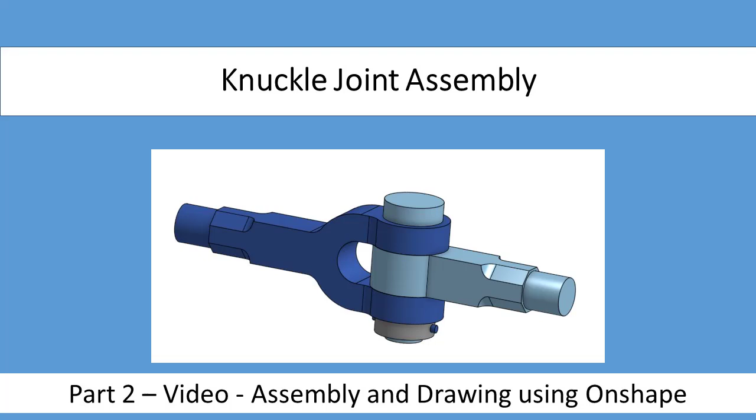In this video, we will learn how to create the assembly of the knuckle joint. If you didn't see how to create the different components of the knuckle joint, you can check my previous video, which I had given in the description as a link. Now let's move on to this video.

Click on the assembly. First, let us try to insert the different parts. First, I am going to insert the fork end. Give the tick mark to confirm it. Whenever you are inserting any component, the first component you must fix. So let us try to fix the fork end by right clicking in the tree. Just confirm the fix so that the fork end will be fixed over here.

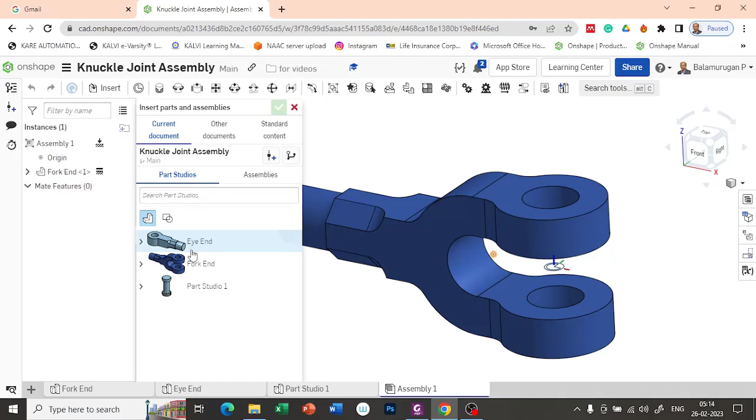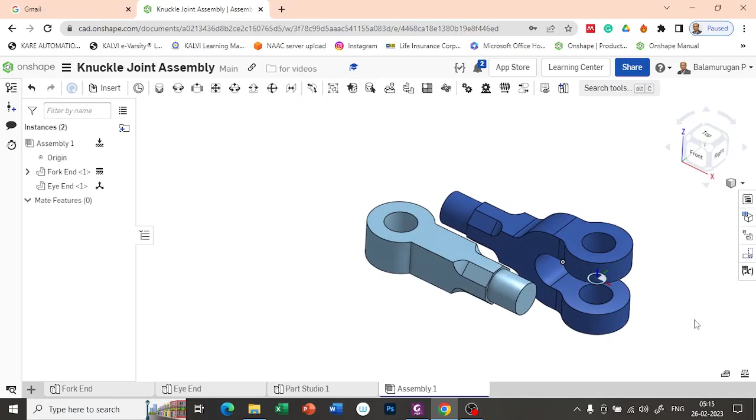Now let's insert the second end, that is eye end, and confirm it. So here you can see I can align this particular hole with this hole over here. So for that I am going to use the revolute mate. The top center, you can fix it out with this bottom center, so that it will be aligned with the Z axis, and Z axis I am coinciding. Just confirm and close it. Now we have connected the second one.

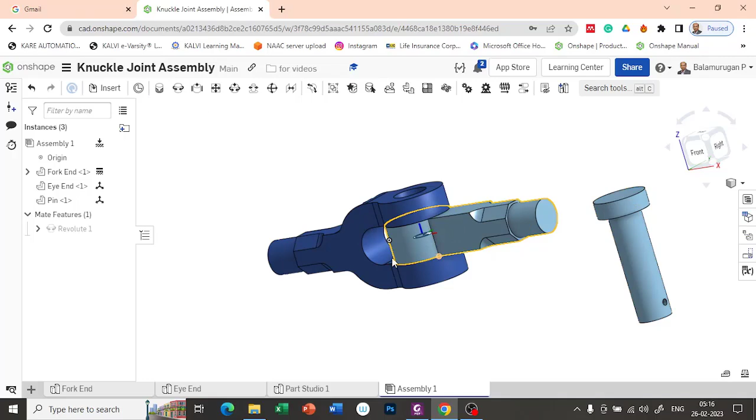Now let's try to insert the third part. So the third part I am going to insert is a pin. So this pin is going to be placed inside this hole. Let's try to make it. So here also the pin is allowed to revolve. So let me try to make the cylindrical mate between this one and this surface, the inner surface. So let us try to make it.

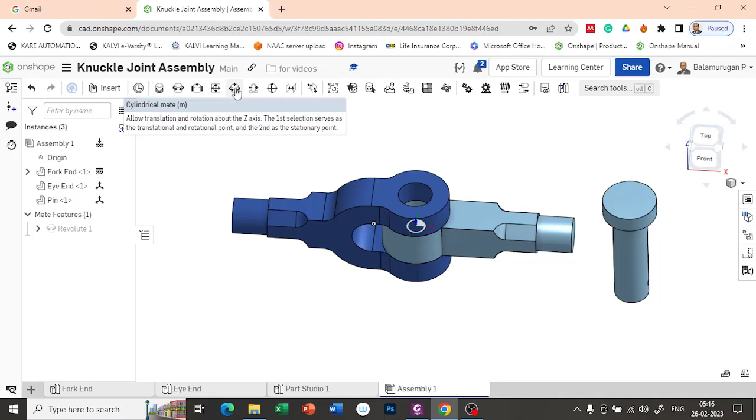So here I don't want any translation, so let us try to make the revolute mate. So here the top face end, click on that, and here the top face end. Confirm it. Okay.

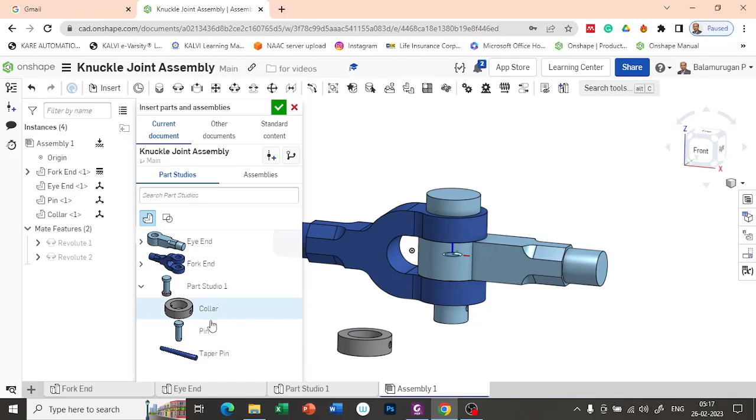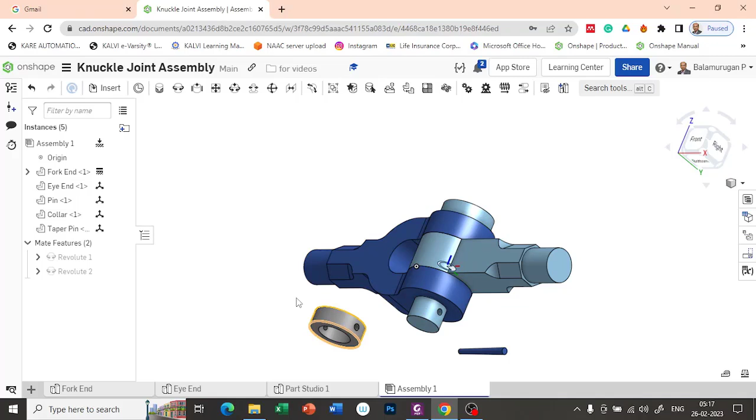So now the remaining two parts we need to insert. So let's insert the collar, and let's insert the taper pin. So these two we have to place over here. So for inserting that, the hole center has to be at this exact place. So let's try to first coincide this center with this center, then let's give the offset distance.

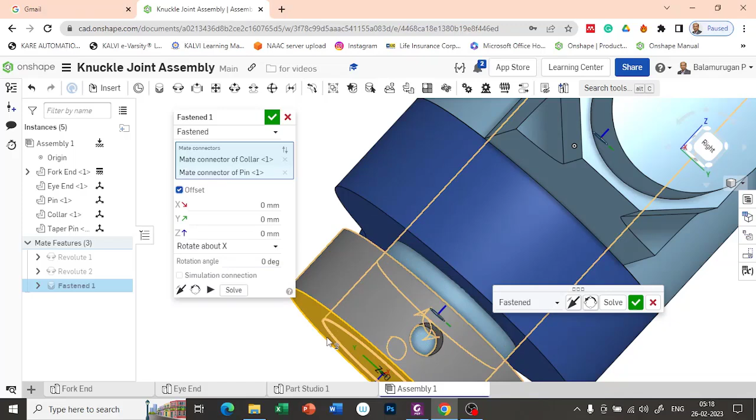So go for the fasten mate, between this center and this center. So if you provide it, you can see there is a center distance between the inner hole, the pin hole, and this collar hole. So that distance is actually 4 mm, on the negative direction. So let me give it as 4 mm.

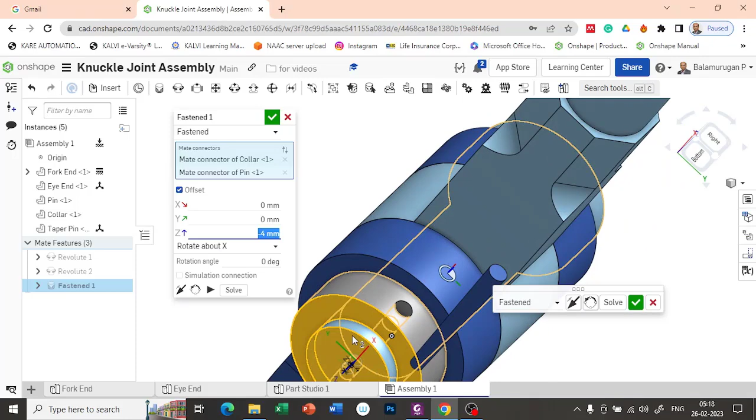Now you can see that is moved. So here you can see that. Okay. So let's confirm it. So now the collar is inserted into the pin.

Now I need to make this pin inserted inside this. For that, there are two ways. One is you can make a mate connector on the collar center or on the pin center, so any one you can make. The other one, if I place the mate connector at the center and coincide it, I can make the two parts together easily. So for that, let's try to learn how to create a mate connector on a particular component.

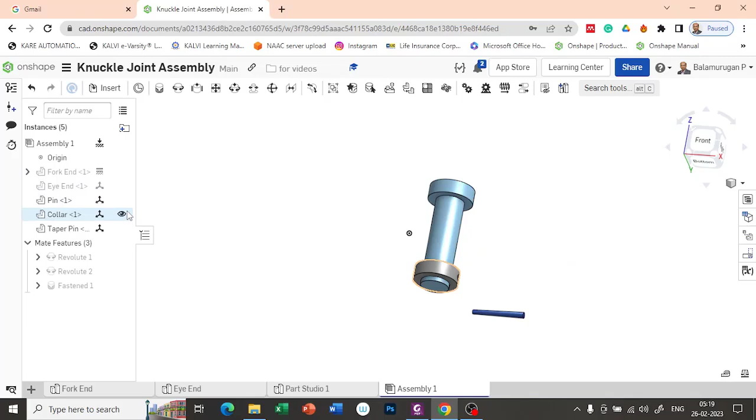So let us switch off the other components over here. For example, I am switching off except the collar. So let us try to make it. So fork end, eye end, pin, I am switching it off, that is hiding. Now let's try to insert a mate connector exactly on the center, which is having the Z axis in the orientation of the taper pin.

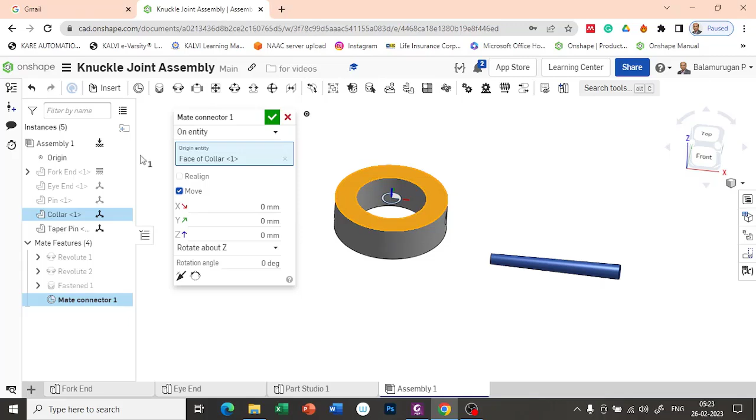Let's try. I am trying to move the mate connector here from this one. Now let me try to move it towards the center, -6, so that it will move towards the center. Now I am going to rotate. Actually this one I have missed out here. So this one I am going to rotate about the y axis so that Z will come and align with this hole. So I am going to rotate about the y axis and the rotation angle is 90 degrees.

So now you can see here it is aligned with this one. Now let's try to do the fasten mate between this one and this center, so that both will be aligned properly. Now you can switch on everything.

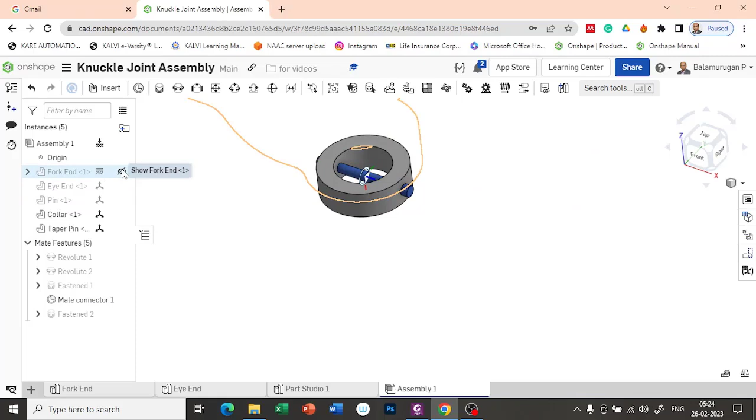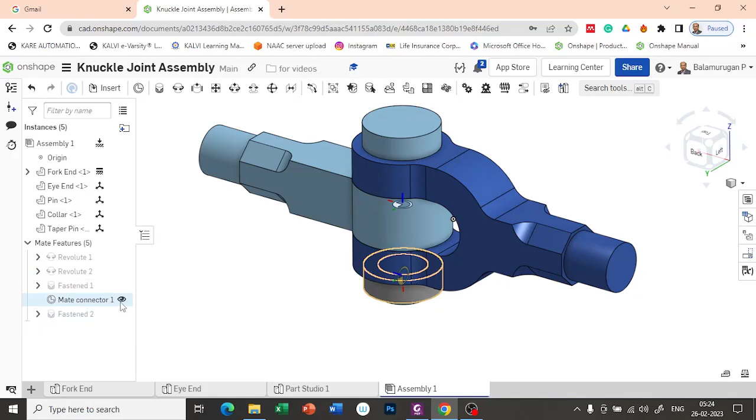We can see here all the parts are assembled together now. So if you want to switch off the mate connectors, you can switch it off if you want. Or if you want to switch off all the mate connectors, right click over here. First let us show all mate connectors. Then if you want to hide all mate connectors, you can hide it. So everything we have aligned. Now if you want to just check it out, the revolute mate, you can see it over here.

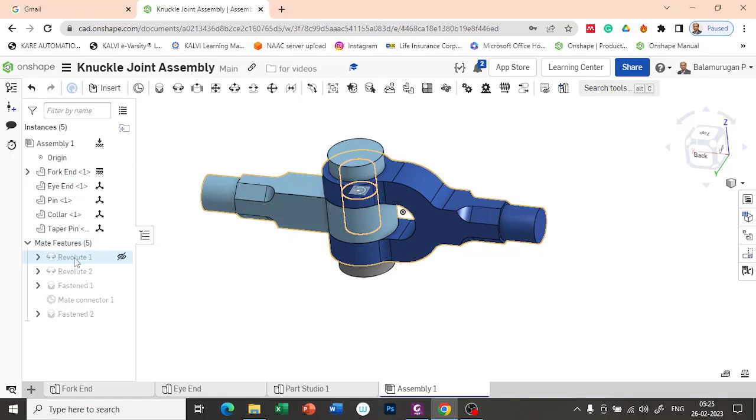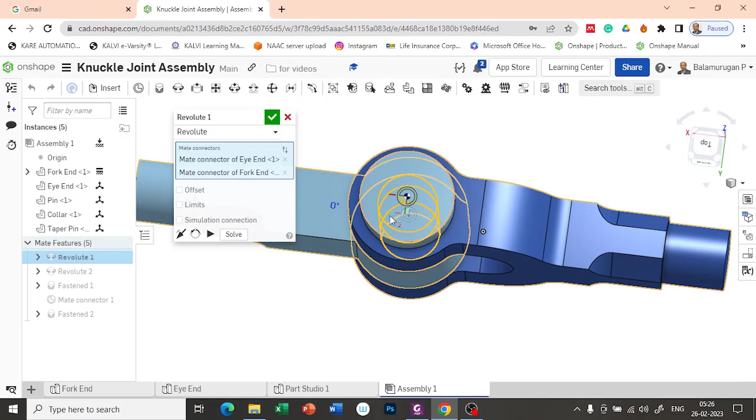So this is how it will be revolved. If you want to constrain it, you can do the constraining from this end to this end. If you want to provide a limit, you can reorient the secondary axis. In this case, if you reorient the secondary axis, it will start from here as 0.

Let's try to provide the limits. The angle of orientation 0 is maximum, 0 is minimum and 180 is maximum. If I provide that, you can feel the difference now. So here it's 0, it's 180.

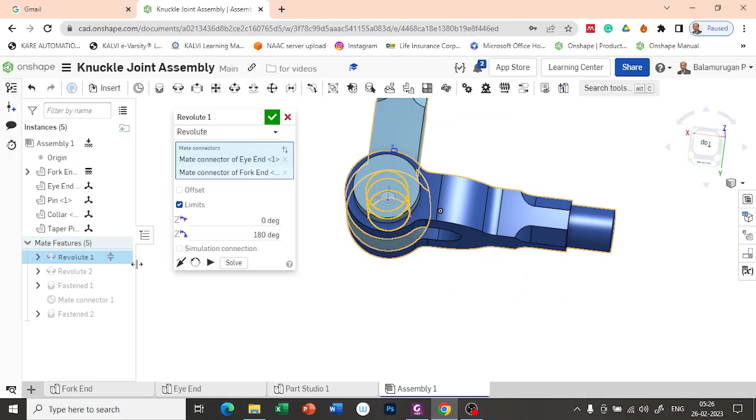Now let's try to reorient the axis again. Now you can see here this is 0 and this will become 180. So now it will only move along this particular direction. It won't move beyond that.

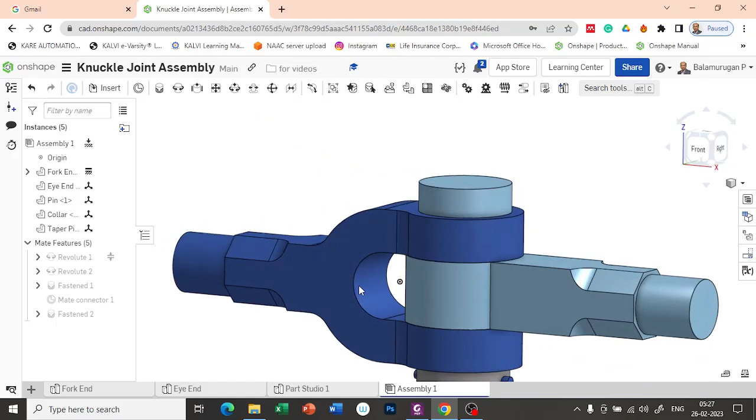So now we have completed our assembly. Now let us try to create the drawings. Let's create the drawing. I am selecting the template as ISO A4. Give OK.

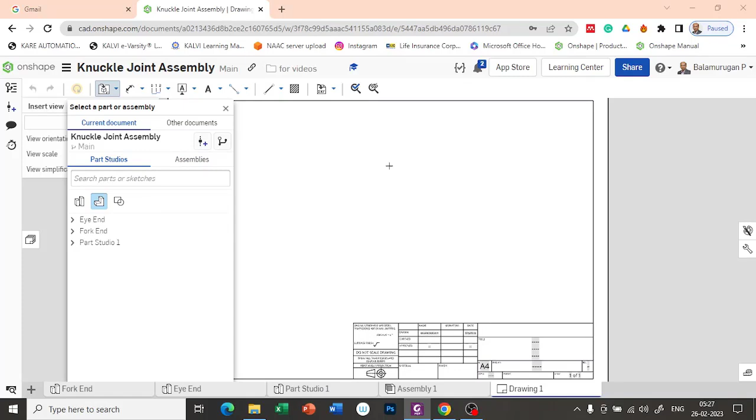Now in the first sheet, let us try to create the assembly. Then we will move on and create the individual component drawings. Go to the assembly, click on the assembly, and defaultly the front view will come. Let's click over here for the front view. Then it will show you the top view.

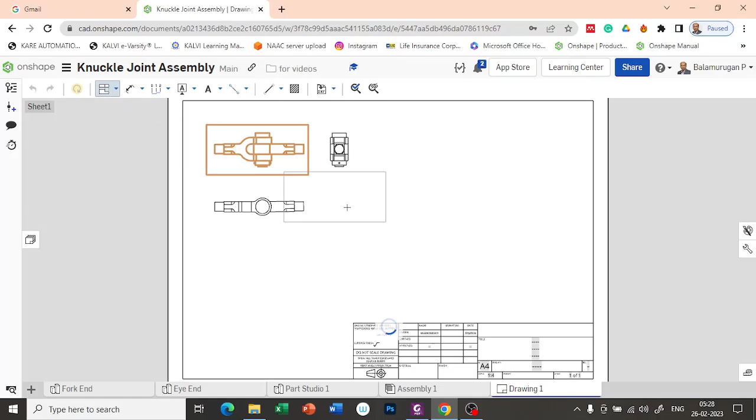Then let's go for the side view and isometric view. You can click over here in the projected view for the side view and the isometric view. For isometric view, just click on the front view and move your mouse diagonally to get the isometric view.

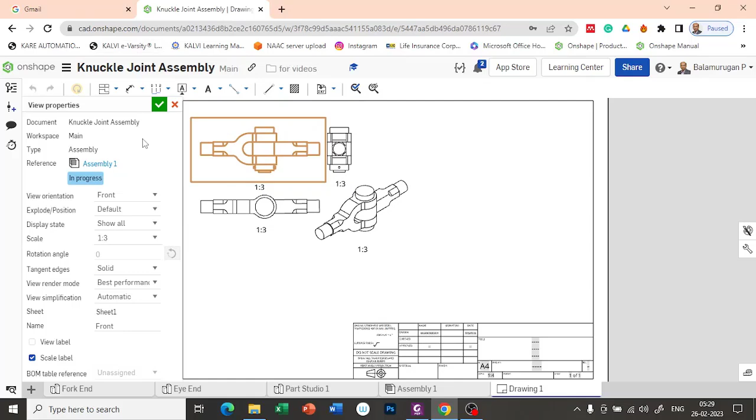Suppose if you want to change the scale, you can double click over here and change the scale to 1:3 or 1:2 if you want, so that you can make it bigger. Let me keep it as 1:3, or 1:2, let's try to make it. Okay, no, it's going too big, so let's make it as 1:3 and let's confirm it.

So here you can see the fillet edges are coming over here. I don't want the fillet edges. If you want, you can see here at this place you are having the fillet edge. So these are all fillet edges. If you don't want this fillet edge to be placed over here, you can manually remove it. So how can we remove it? Let's just check it out.

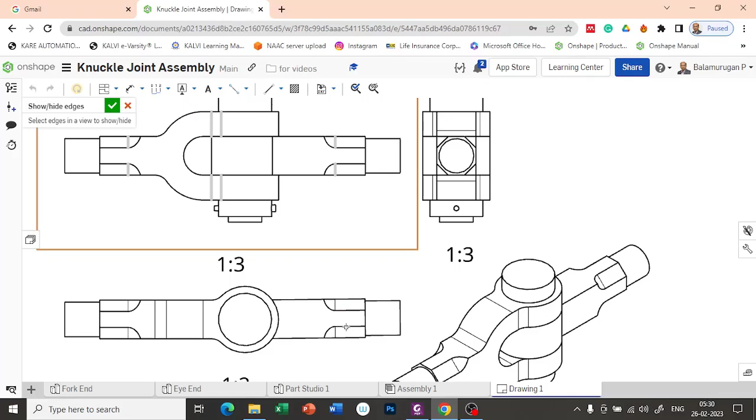Right click, show/hide edges. Select that, and select the edges which are created only due to the fillet. If you switch off everything, let's give it as OK. Now you can see that fillet edges are removed.

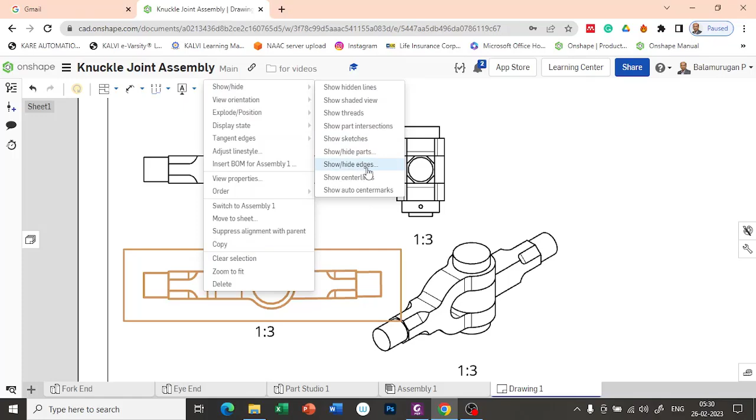Similar way you can able to remove it in all the views. Let's try to remove it. So show/hide edges. Select this edge and this. Now let's give OK. Now let's try to move over here.

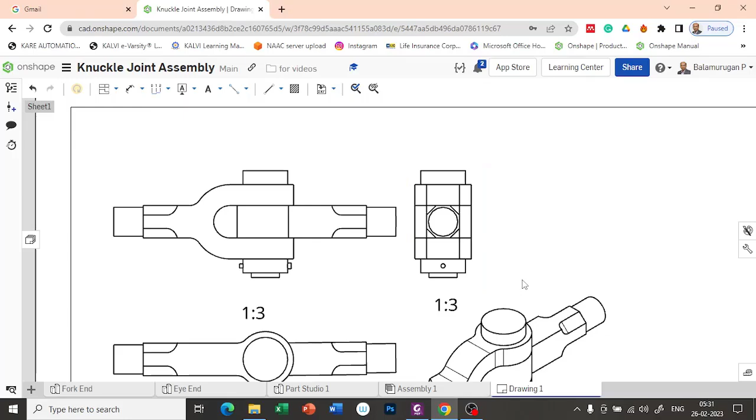So these light lines are your hidden edges. Show bar hide edges. So confirm it. Similarly here also you can able to remove the edges if you want. Show bar hide edges.

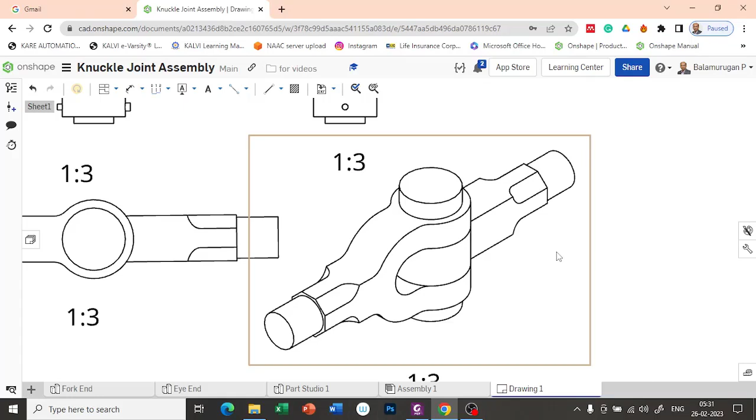So if you want to remove this face, you can give OK, so that it will look neat on your isometric view, so that it will be properly visible.

Now let's try to insert the BOM here, bill of materials. For that, let me go into the assembly first. So here click on the bill of materials table. The default one is here. Let me try to add the column of name and material.

Let me try to remove the part number column and description column. So let me move the name to the left side and material to the left side. So the quantity is over here.

Now let's try to give the material for all these things. Let's double click it and change this material, since different types of steels are available. Let me make it as hardened alloy steel. This one also hardened alloy steel. And the remaining three, let me make it as carbon steel. So double click over here and make it as carbon steel.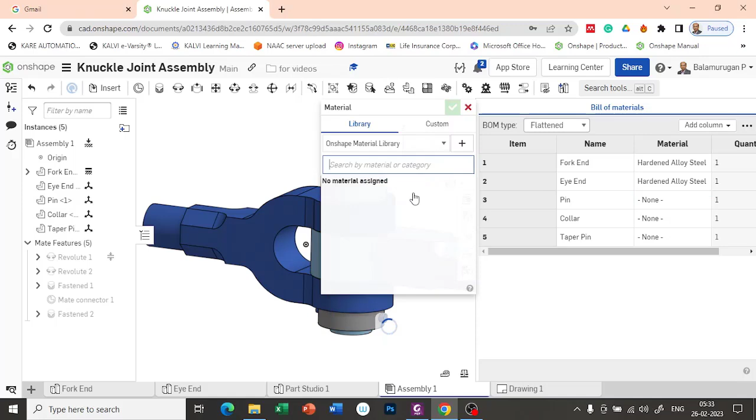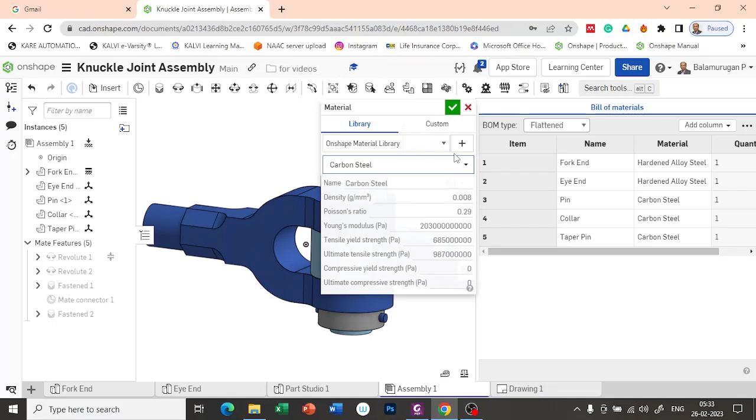And the collar, I am making it as carbon steel. And the taper pin, let me make it as carbon steel. Let's confirm it. So we got the BOM table corrected here.

Now let's go into the drawing and insert it. So here, let's insert the BOM table, coming under the node BOM table. I'm going to select the stamp point as this, right top, and select it over here. So first, initially the default BOM table will come. If you want to update the BOM table from the assembly, just click over here, update from this workspace, so it will be updated over here. Now we got our BOM table.

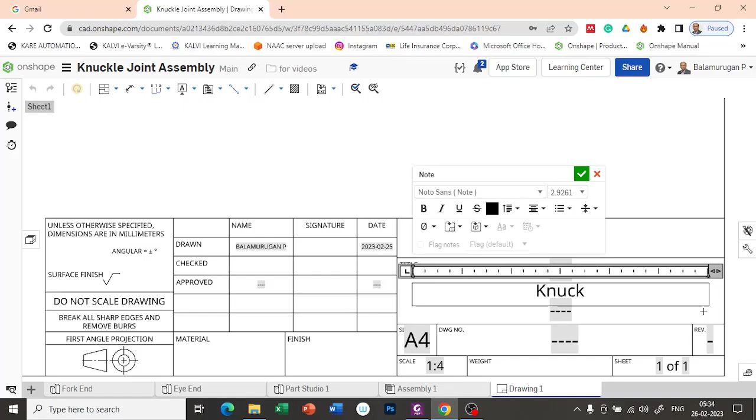Now let's try to create the individual assembly. Here you provide the title: Knuckle joint assembly. And type your register number over here.

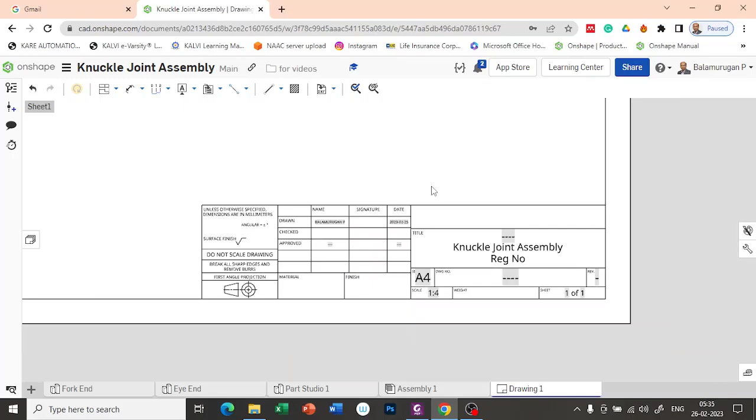Now let's try to create the individual component drawings. For that, I don't have enough space here, so let's add a new sheet. Click on this one to create a new sheet.

Once it is inserted, let's make the different views for each component. Go to this place and insert view. In the insert, go to the part studio and click on the Fork End. This is our first part.

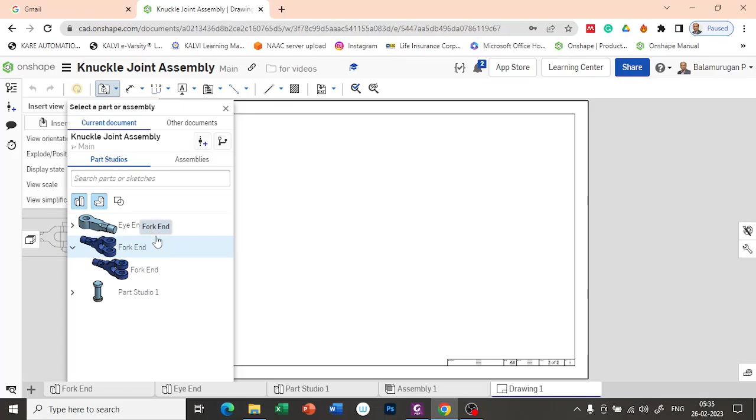So for that, front view and top view, I'm drawing it. This two is enough, you can make it.

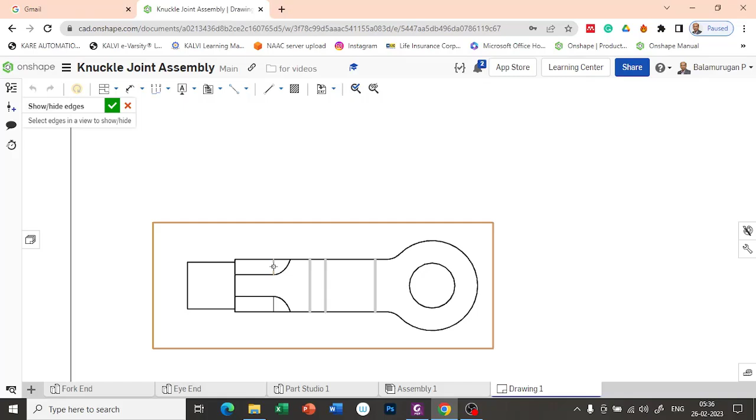Here also you can remove the edges. For example, let me remove the edges by using show/hide edges. So this 4 edges and this 2 edges, I can remove it. Similarly here, I want to remove the edges which represent the fillet. Let me confirm it.

Now provide the cross section over here. You can do partial sectioning or full sectioning if you want. Let's try the partial sectioning. For that, I'm going to use the broken out section.

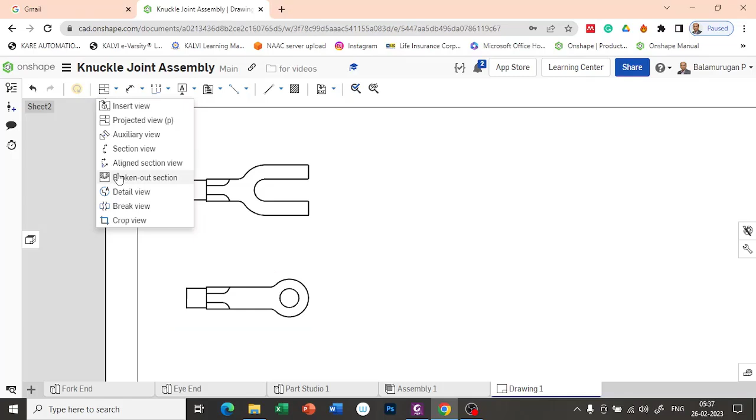First let's make the dimension on the top view, so you can understand how much depth I need to give on the broken out section. Let's try to make it.

Go to dimension. This one is radius 24 and this one is diameter 24. So now diameter 24 is there, radius 24 is there. That one I am going to show in the cross section - the hole I'm going to show here.

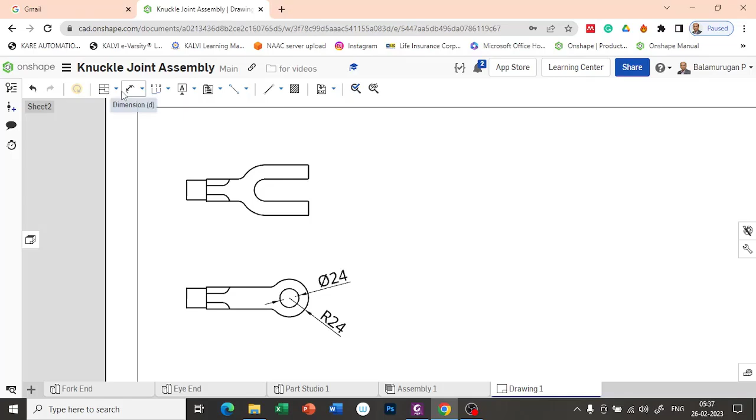So for that I am going to use a broken out section. For that you need some profile to be drawn. Let's draw it again. Broken out section.

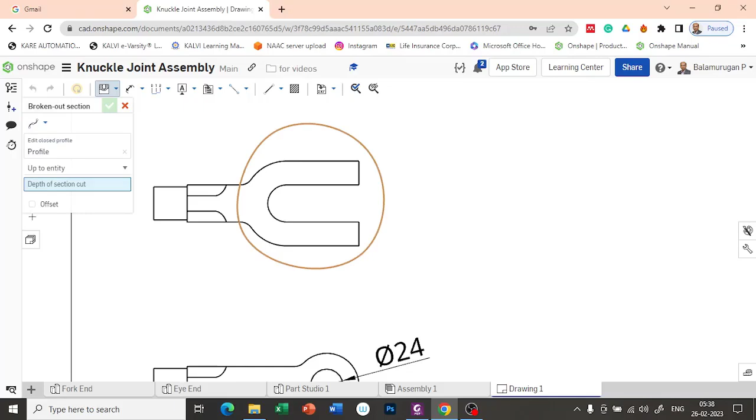So this one I am going to make the section. Depth of section cut, it is asking. You can see here it is radius 24, so I am giving diameter 24 - that is up to the center I am going to make a cut from one end. So at the center I want to make a cut. Here the depth of section cut, I am going to represent it over here.

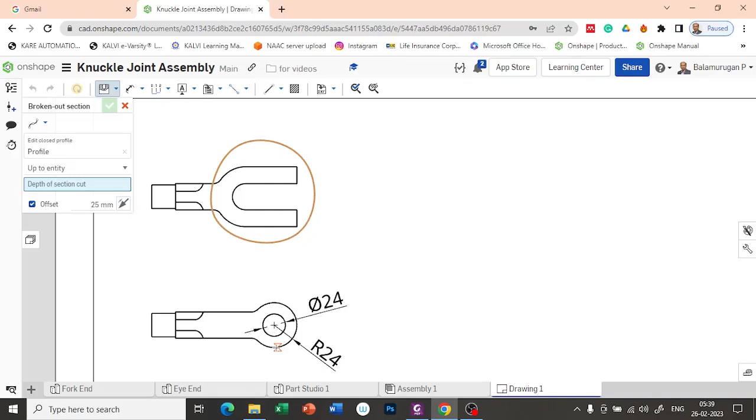Let's provide the offset distance as 25 mm. Now you can see it over here - from this point the offset distance is 25 mm. So it's confirmed.

Now let's change the settings over here. I want to change the pattern as general, ANSI, so that it will be like a continuous line.

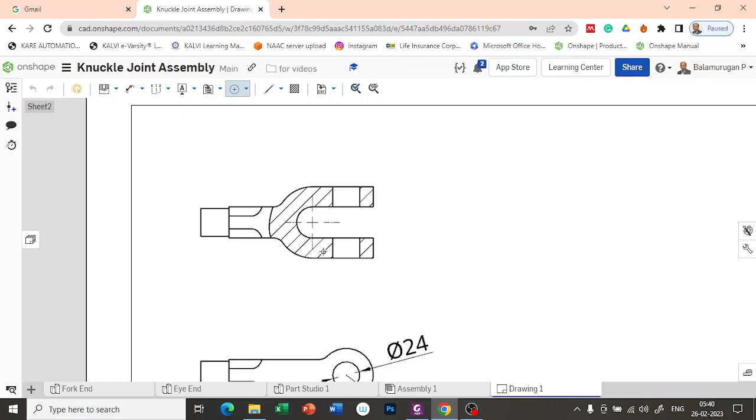Now let's try to insert other parts. First let us complete the dimensions. For that let's try to make the center mark over here. For this radius I'm going to mark the center, and for the circle I'm going to mark the center.

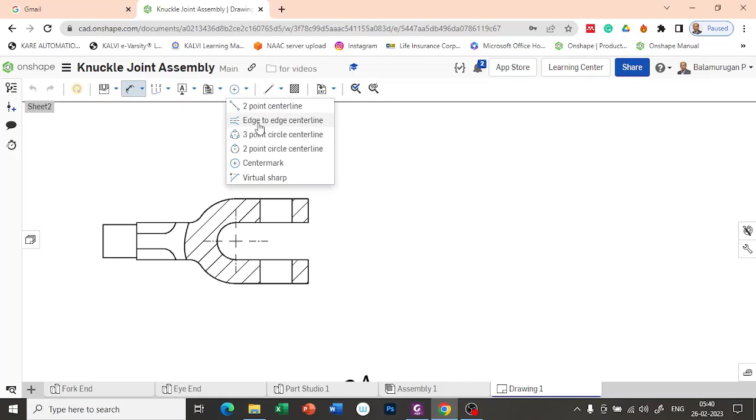Now let's try to provide the dimensions over here. So for this also, edge to edge center line between these two edges. So I'm going to make the center line. In this one, let me try to extend this.

Now let us provide the dimensions. Between this center and this center, the dimension is 30. Let's try to make it shorter. And the dimension between this center and this end, it's 104. And this radius is 32.

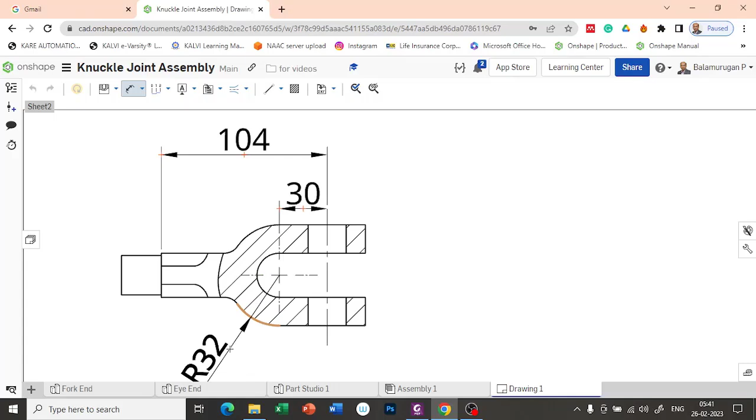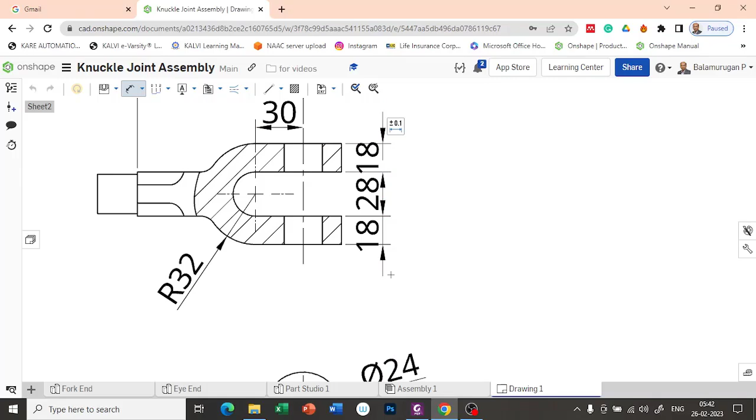And the diameter is already given over here. This thickness is 18. And this gap, it is 28. This gap, it is 18. And here, between these two, you're having this.

For this one I need to insert a symbol, so I'm going to insert a symbol of square. So square 28.

But you can see the dimensions are too big, so let's change the settings in the dimensions. Text height is 3.5 - let's make it 2 so that it will be shorter.

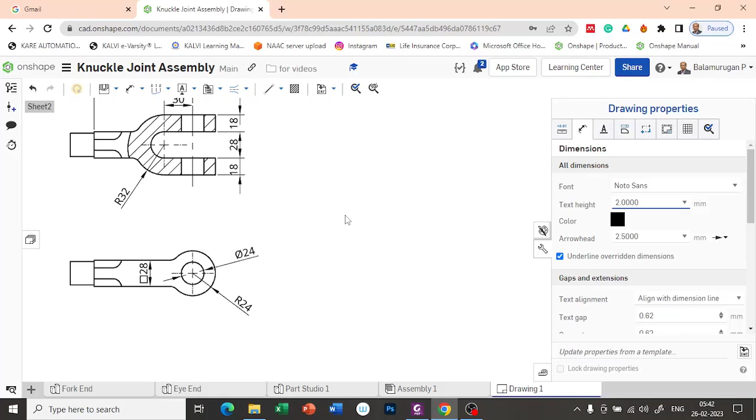Now let us insert all other dimensioning, all other components. Let's try to make it.

Now let's remove the unnecessary edges, fillet edges here. Show bar hide edges. So these two edges I want to remove it, because this one represents the sharp edge, so that's okay.

Now let's try to create a cross section. If you want, you can do the cross section here, or you can simply make it as a hidden line. If you want to show the hidden line, you can show it, but it's not important over here because it's clearly represented, so no need to do it.

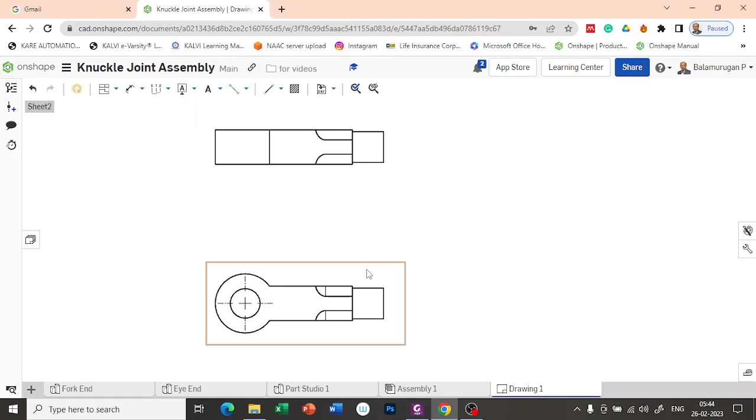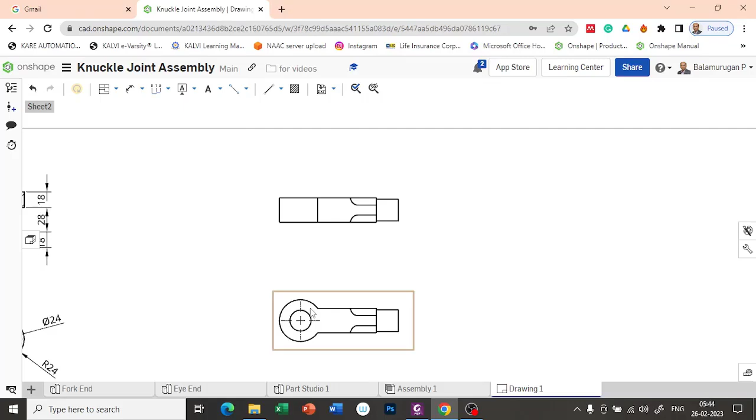So these two edges, let me hide just for better representation. Now let's try to provide the dimensions over here. If you want the hidden lines for the hole, you can make it, but it's clearly visible on the top view, so no need to represent it.

So dimension this one on the top, this one over here. Suppose if you want to provide any dimension from this center to this edge on the front view, then you can provide the section; otherwise no need to provide the section. So here are two ways to represent the distance from here to this. For example, from this place to this place, you can provide it as 86. But if you want to provide the same over here, then you have to do the sectioning, the same broken out section. For example, let's create a broken out section.

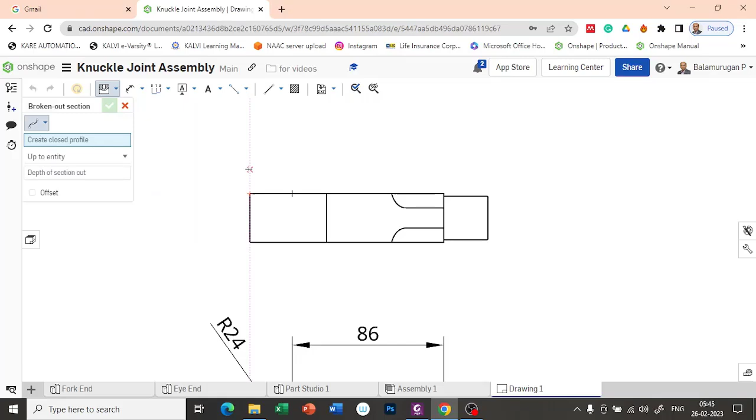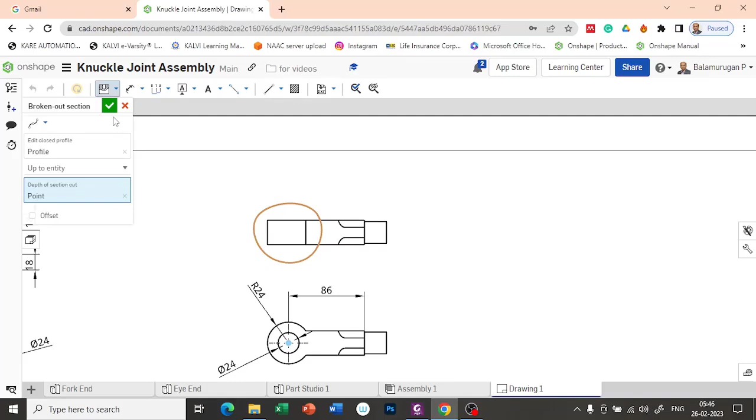So broken out section. You can see I had clicked on the center point, I didn't provide any offset. So if you just click over here, I have removed the broken out section. Okay, so at the center you are having the section here.

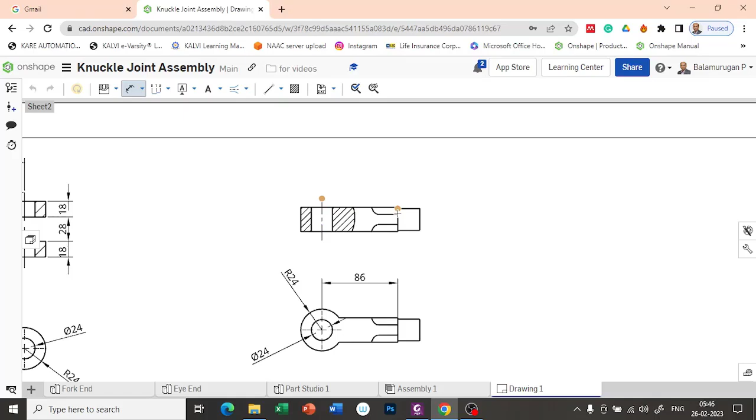Now if you want to provide the dimension between this center, let's try to provide the center line mark here. Between these two, I am drawing a center line. Now if you provide the dimension between this one and this edge, then you can provide it as 86. Suppose if you want to provide this 86 over here, then you can do it like that; otherwise it's not required.

So this one is of diameter 24. Let's represent it by diameter, and here also the diameter is 24. So let's represent the diameter here.

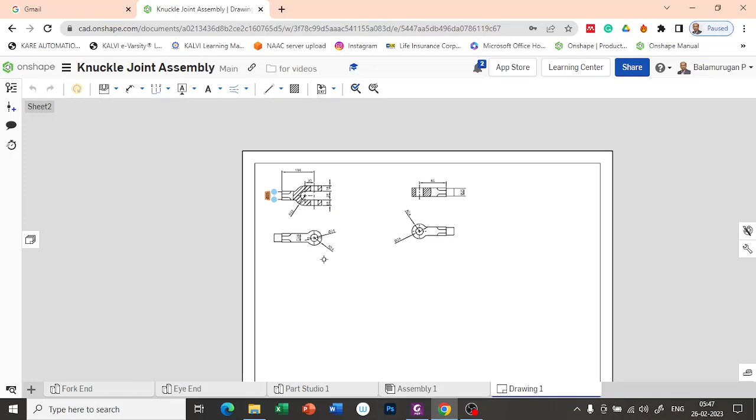So now we have inserted two parts. Now let's try to insert all the other parts, 3, 4 and 5. Let's try to insert it. Insert. So in this one, first let me insert the pin front view and top view.

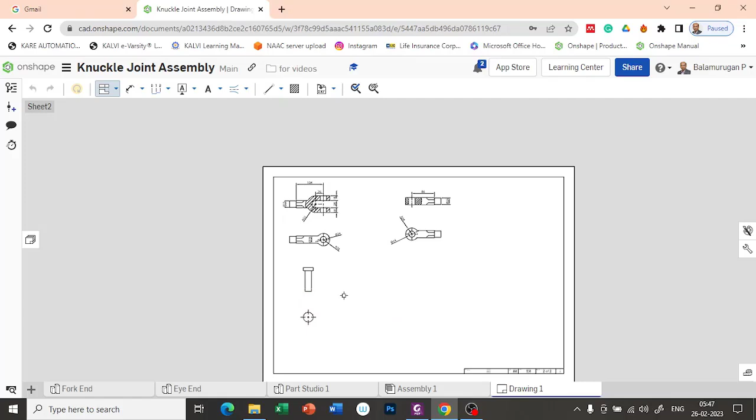So here let's try to provide the dimensions of this cap and the distance between this end and this end. It is 80, and this diameter is 38, and this diameter it is 24. Let's insert it as diameter 24.

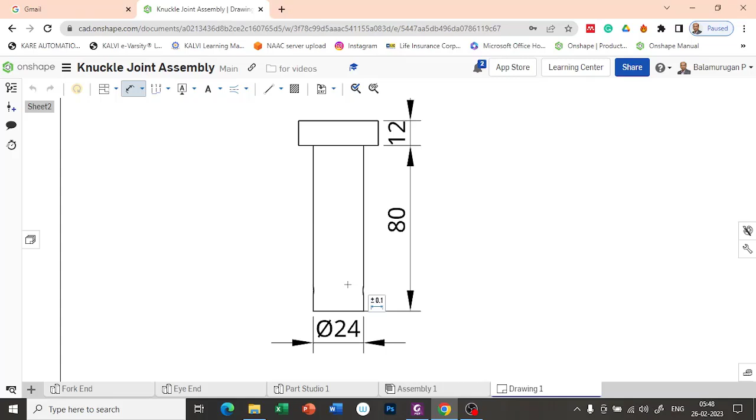Okay, and here we are having a hole at this portion. So you can provide a hidden line over here, or you can do the same type of cross section here. So let's try to use the hidden lines here. For this one, right click over the view, show/hide and show hidden lines. So in that you can see a taper portion is over here.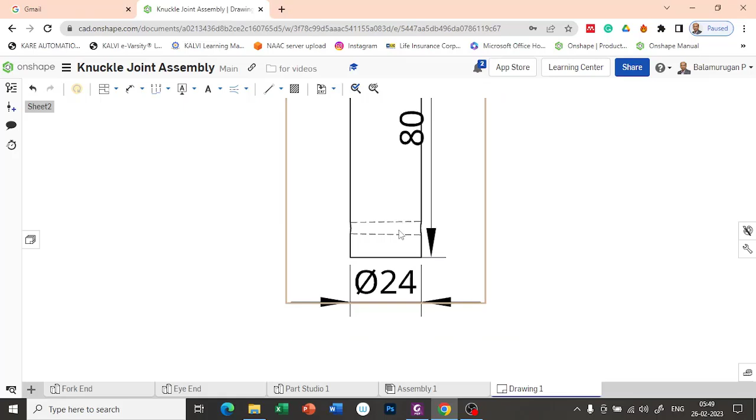Similarly, on this one, if you want to provide the hidden lines, you can provide it over here. So if you want to insert the center mark, you can provide the center mark over here, and you can provide the dimension. Between this end and this end, it's going to be 10.

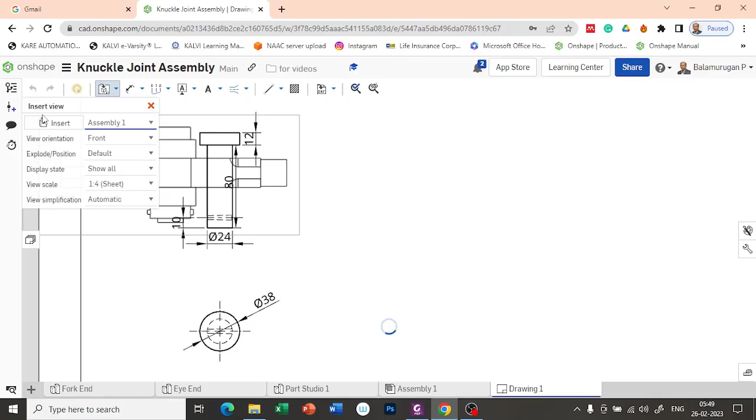Now let's try to insert the other parts. Insert. Go to the collar. So in that, first let me insert the top view so that I can create a sectional front view here. So this one, let me insert the top view.

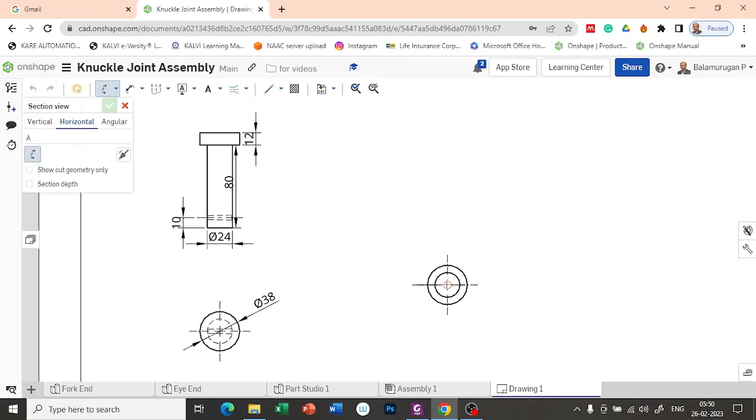Then let's try to make a section view here, which is a horizontal section exactly through the center, and if you project it, you can able to get a sectioned front view. Here you can draw the dimensions of this collar.

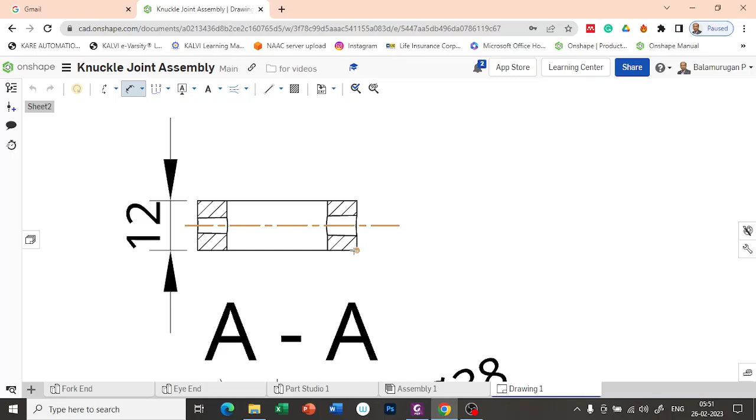So diameter 38 and 24, and this thickness is going to be 12. Is going to be 12, and at this center, so the center mark we have to place it between this. So the center mark, let me extend, and the center is at a distance of 6 mm from one end.

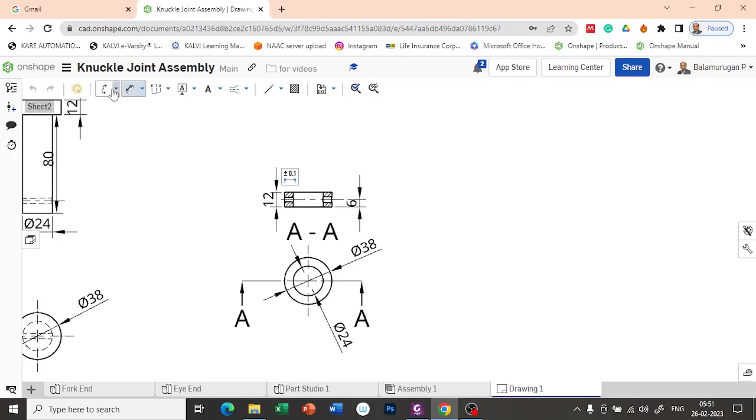Now let's try to provide the taper pin. So here, insert view, insert part studio, taper pin. So now insert the taper pin here.

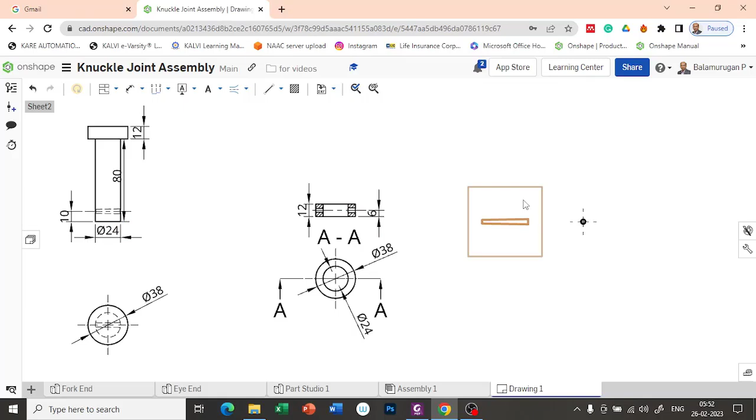So here it looks too small. If you want to make it bigger, you can make it. Just double click over here and change the size to 1:2 so that it looks better. Change the size to 1:2 and then confirm it so that it looks better.

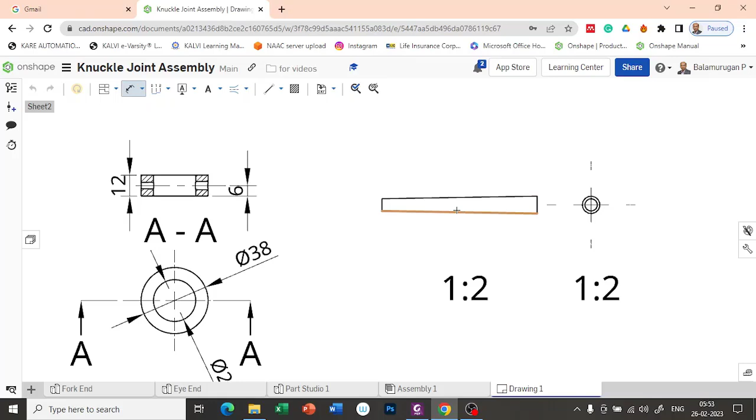Now if you want to see the cross section over here, you can see it by providing the cross section. This is the side view. So here exactly the dimension which is on the center, we have to mark it, or you can just provide the slope over here. Let's try to make a center line, a center line between these two.

So here in the center you can provide the diameter, or you can draw the section view first. So if it is required, you can draw the section view, but in general we cannot draw the section view for the pin. Just you need to provide the slope for this.

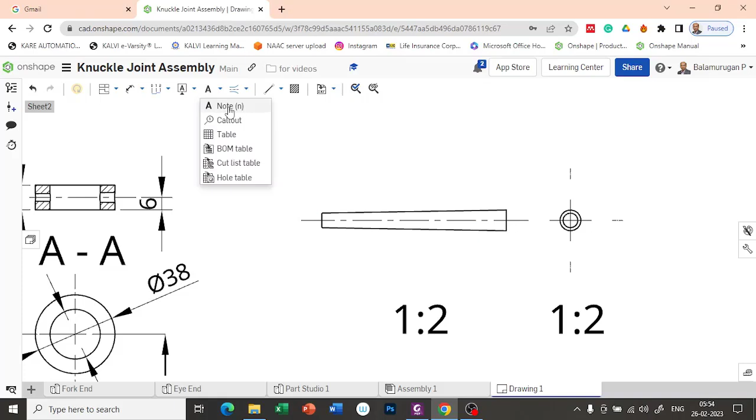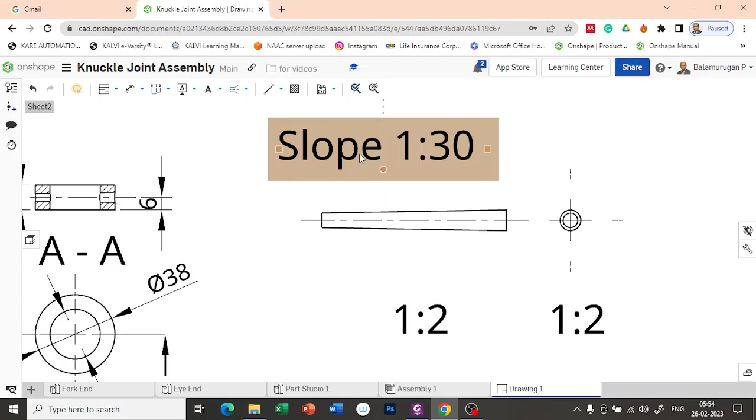So for adding a slope, you need a leader. First for that, let me make a note over here. So the note is of slope 1:30. So we have added a data here. In this one you can change the size if you want, as 2. Okay.

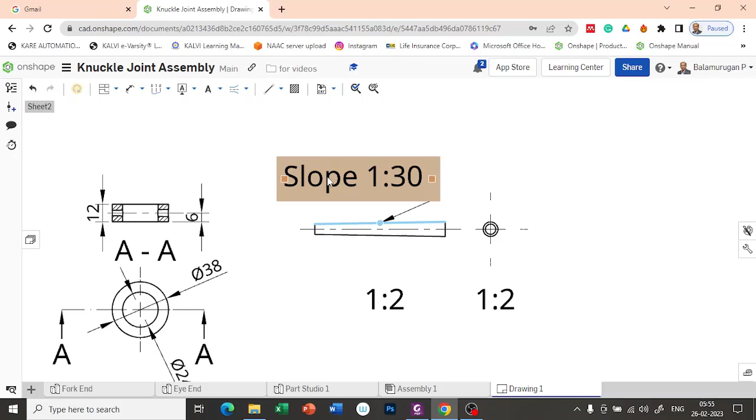Then you select the note and provide add leader. So in this, just place it over here. So you can say that the slope is of dimension 1:30. The slope is of dimension 1:30. Like that you can provide it. Okay.

So I think we have completed all the component drawings. Thanks for watching the video.